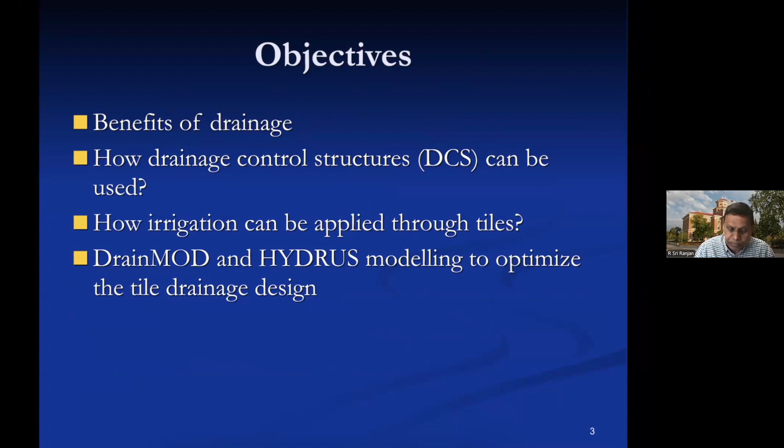Some of the benefits of drainage: water needs 5 times more heat to warm up compared to dry soil, and the only source of energy to warm up the soil is the sun's energy. Therefore, a drained field will warm up much faster, allowing cultivation and operation much earlier. Even if planted, soil will be ready for germination much earlier in drained soil than in undrained fields. In addition, wet soils have a high risk of soil compaction. You want the soil to be lower than the lower plastic limit, at least in the top 2 feet, so you can get on the field without damaging the soil. Drainage certainly improves the number of trafficable days, extending the time available for using your machinery. So basically, it's a win-win.

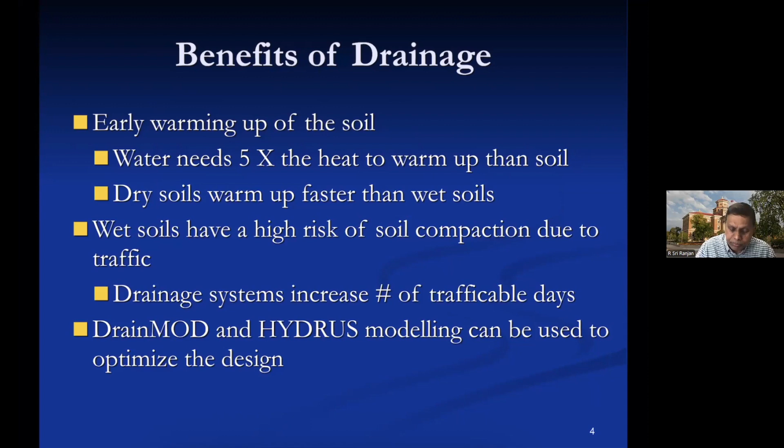We use, as I said earlier, DRAINMOD and HYDRUS for modeling, so we can optimize the design, and I will show you examples of that as we go along. Here is a complex graph showing the water table depth from the ground surface. In this case, this is the soil surface, and the tile drain is installed at 0.9 meters below.

And we have in the middle of the field a water level sensor in a piezometer that monitors every 3 hours what the water level is.

So if you look at this carefully, the blue line represents the drained field, and the red line represents the undrained field. You can see within 3 days of the rainfall, the water table went up near the surface and then dropped. The drop in the no-drain field was only 0.44 meters in 3 days, whereas in the drained field it was 0.7 meters in 3 days.

So the faster you can bring the water table down, the better it is for the crop. Obviously, the drain spacing will affect that. The closer the drain spacing, the faster the drop. But the closer the drain spacing, the more it costs to install.

We will actually talk about the spacing of the tile later on as I proceed in the next few slides. So this is actually a study done at Hespler Farms.

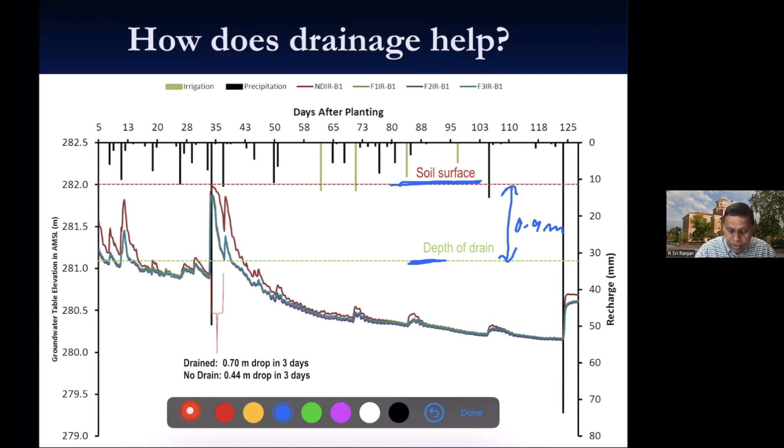In this case, you can see we modeled a particular field, for 2019, 2020, at the Pese site. You can see the dotted lines are the simulated water table depth, and the dashed lines in the bottom graph, and then the solid lines are the actual measured water table depth. You can see it pretty much matches what is being observed.

So once we model the field and calibrate and validate the model, then we can run simulations using rainfall patterns from different years.

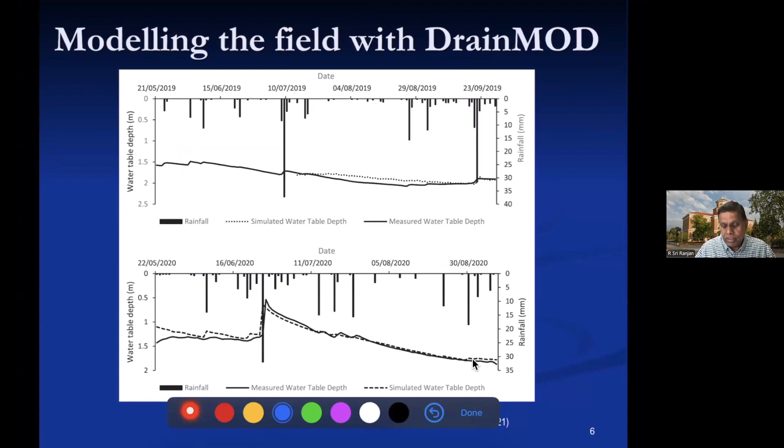So if I go to a different year, now this is again a complex graph showing at different years the impact of using different drain spacing. So we tested 8 meters, 15 meters, 30, 50, 70 and 90 meters, and we looked at the relative yield.

And for different years, you can see as you increase the drain spacing, the relative yield goes down. Some years it's worse, some years it's not that bad. It all depends on the rainfall for that particular year. If it's a dry year, drain spacing is not going to have much of an effect. But if it's a wet year, you're going to have an effect, and the drain spacing will matter.

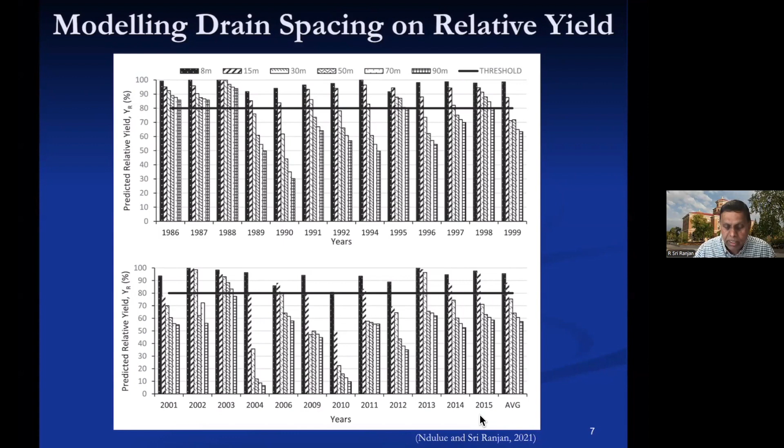So you can actually model this for every field and then determine what would be the optimum drain spacing. So this is one area where we try to optimize the design.

Here's another study where we actually use this data to predict the cost implications. Obviously, when you bring the spacing closer together, it costs more money. So we looked at the yield impact of increasing the spacing, and then also looked at the profit related to closer spaced drains.

And then we kind of optimized the design to about 10 meters in this case. So this kind of study will tell you, using long-term data, what would be the profitability of putting in a drainage system and what spacing we need to use for a particular field.

So this is actually based on field data, then trying to develop a model and using the model to predict what might happen under different rainfall patterns in different years.

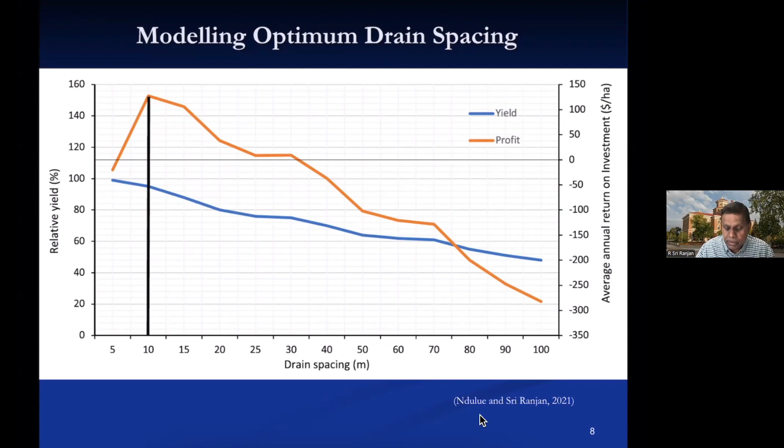Now in another study, we also looked at the workable days. In this case, we were looking at the soil moisture status in the top 2 feet of the soil. So as long as the water content in the top 2 feet of soil is below the lower plastic limit for that particular soil, we can get on the field without causing compaction.

So then we do a count of how many days we can get on the field. We also looked at the non-workable days and the total number of non-workable days. Based on this study, we found that around 12 meters is the spacing for this particular soil. So this kind of analysis helps us determine or at least optimize the drainage spacing.

So based on all of these studies, what we found out was we still have to get the drain spacing closer than what we are normally doing here. So I would say around 8 to 10 meters is probably the best way to go. And if you're going to put them so close, then there are other benefits as well, which I'm going to talk about in the next few slides.

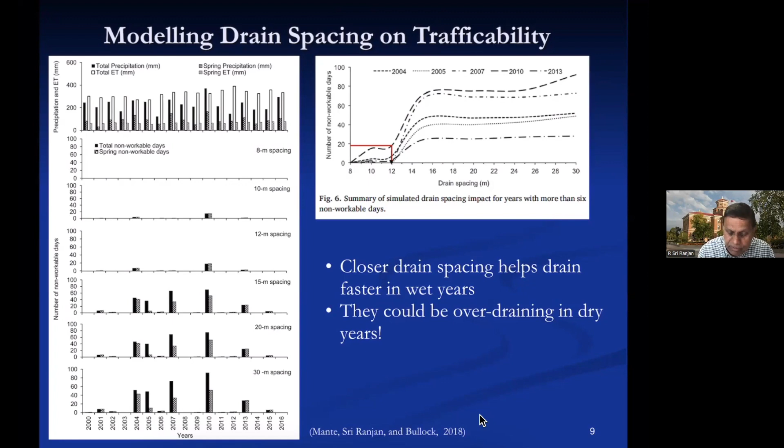So when you have the tile drain spacing less than 12 meters, we can also use it for sub-irrigation. And I will talk about that later on when I explain what sub-irrigation is all about.

Now, in addition to all of these, we also need to know what depth we need to install the drain, because the deeper you install, the wider you can go. But it affects the sub-irrigation potential. Since we are installing closer together, we can install them shallower, which is much better for sub-irrigation. So there's a trade-off there, and we need to look at that as well.

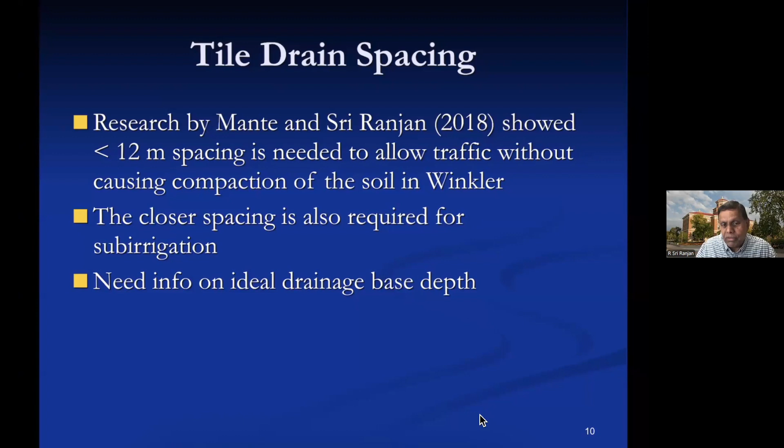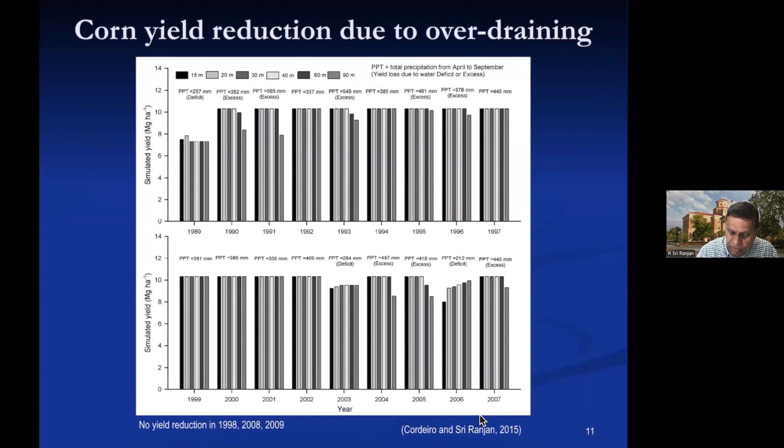Now here's another study that was done at Hespeler farms. You can see some years there's a yield reduction. If it's a deficit year, like 1989, the yield would have been very low. Whereas if you look at the year 2006, you can see that as you increase the drain spacing, the yield goes up, mainly because this was a dry year and narrow spacing was actually draining the water.

This is actually modeled after free drainage, meaning we are not controlling the amount of water outflow. In years like 1992, the rainfall pattern was adequate, so the spacing didn't matter much. In 1991 there was a slight excess, but up to a certain level there wasn't much effect. But if it's a wet year, the spacing matters. If it's a dry year, the spacing will affect it the opposite way.

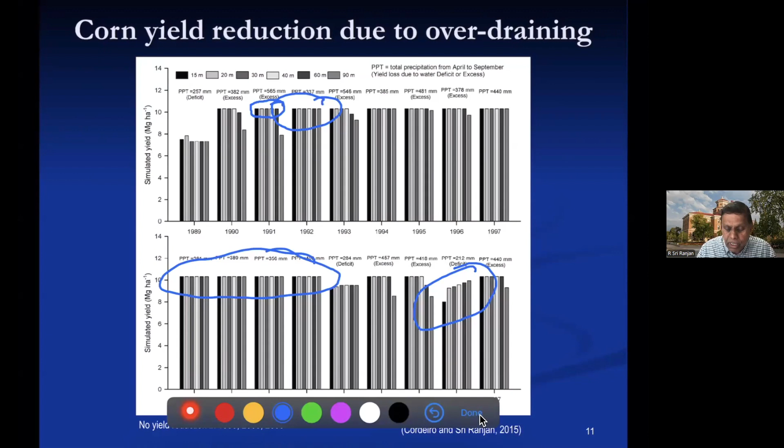So the main idea here is to not overdrain the field. If you're not going to overdrain the field, there's a practice called control drainage, where you're trying to limit the outflow from the free drainage. There are techniques available to limit the outflow, and this is where control drainage comes into play.

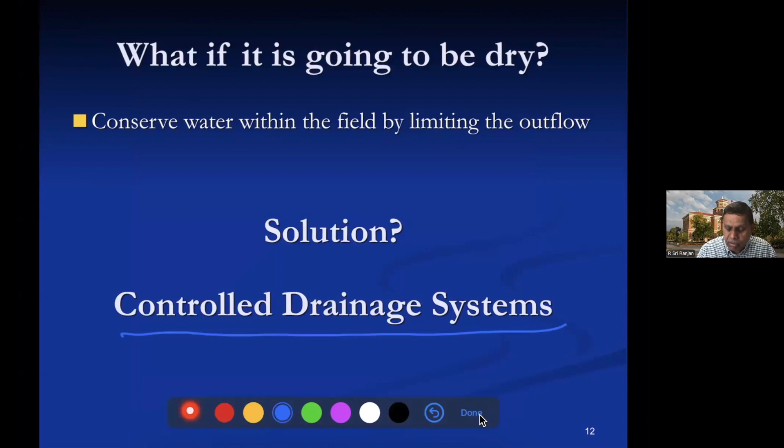With control drainage, what we do is have a gate at the end of the tile at the outlet, like shown here. We can raise and lower this gate to control the level of the water inside the field. But if the field is sloping, you might cause an uneven depth of water within the entire field, and you might defeat the purpose of having a control structure.

So in this case, you may want to have an inline control structure along the length, so that the water surface will be dropping at foot intervals as you go down slope.

Before control drainage came into play, most field drains were installed downslope, because for transmitting the water, the faster the water flow, the narrower or smaller the drain you can use. So you can move the water faster if the field drains are downslope. That was generally the practice for decades.

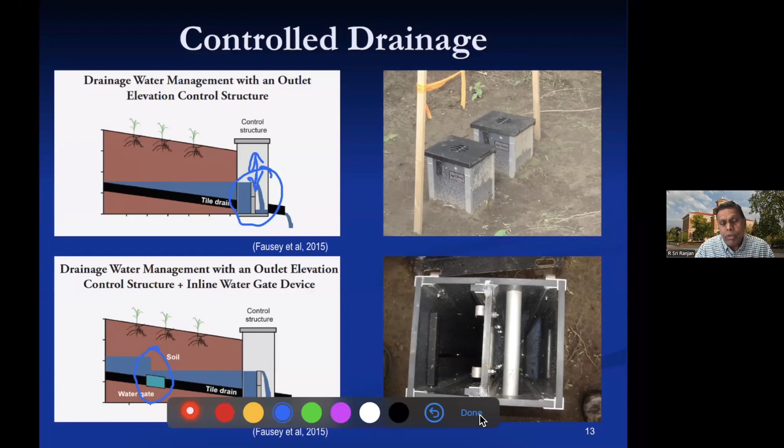But with control drainage, that design is not conducive, because in control drainage you want the field drains to be on the contour so there'll be even spreading of the water, and the downslope will be the collector drain or the submain.

So let me show you how that works. Here you have the field drains going parallel to the field, almost on the contours, with the submain going downslope with control structures called water gates installed, so they step the water at one foot intervals. By blocking the water at the outlet right here, water will back up and go one step up, back up again, one step up, and so on. This way the entire field's water level can be controlled with one outlet point.

But this requires careful design. This is the part I wanted to convey as the main component of this study, or at least this presentation: the orientation of the tiles that are installed is very critical to make this work properly and to gain the benefits.

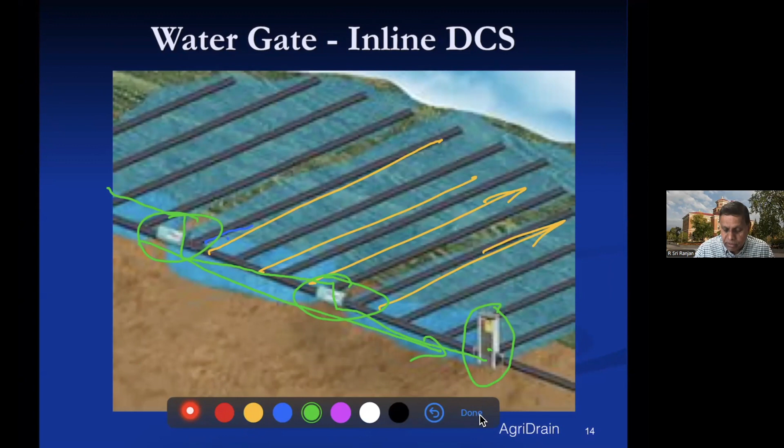This is a particular study that was done, reported by Fausey, I believe from North Carolina State University. This is another study that was recently reported, I'd say about 10 years ago.

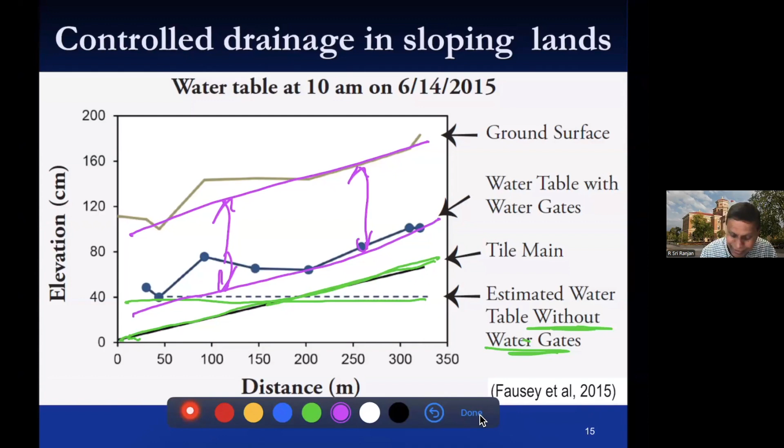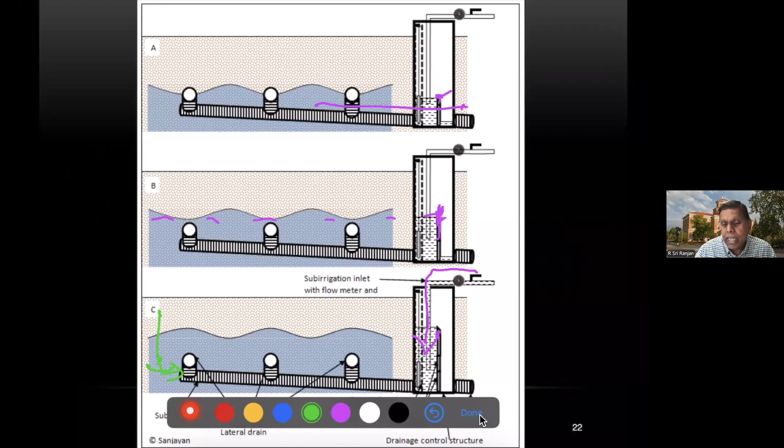So these are the three different modes in which the control structures can be operated: one is the free drainage mode in the springtime, another is the control drainage mode when you anticipate there won't be any rainfall and you don't need to drain the field completely, and if you want to sub-irrigate, you can apply water back through the tile.

Now, what are the problems? The upward flux of water to meet plant water uptake works against gravity, and it's also affected by soil water content. If the soil is dry, the upward flux is going to be limited; the wetter the soil, the greater the upward flux. So the soil moisture in the upper layers, at least in the root zone, will control the upward flux.

The layered soil will also affect the upward flux. If you have any kind of sand lens, the upward flux will be limited. So this is something that should be kept in mind before we design the system.

Soil sampling in the field to determine the horizon and the variation in soil texture needs to be considered. Some of the things we can do is input this information into a computer model and run simulations with 30-year weather data to predict what might happen. So before investing a lot of money into this system, it's better to do a little study and evaluate the field for appropriateness, or at least for the situation at hand.

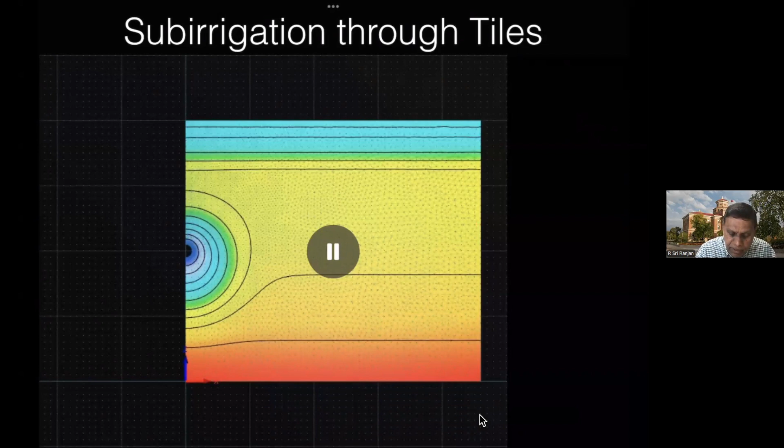The redder the surface color, the drier it is; the more blue, the wetter it is. So we're applying water through the tile, and it's spreading slowly, going below as well as above. But if I increase it, you begin to see some wetting on the surface - that's because it rained in that particular field, adding moisture on the surface, and over time...

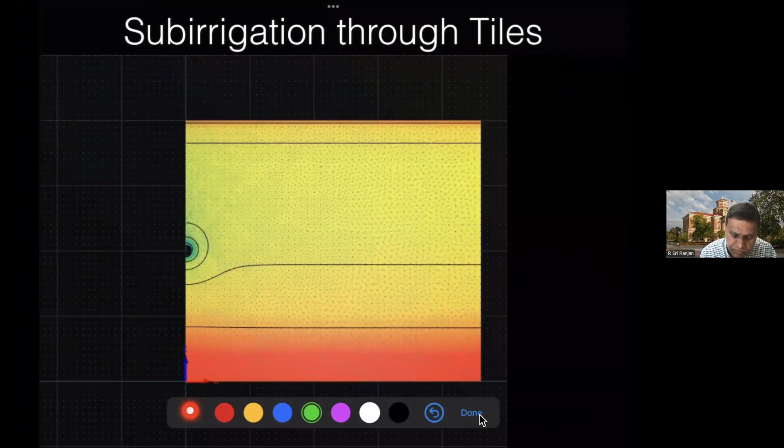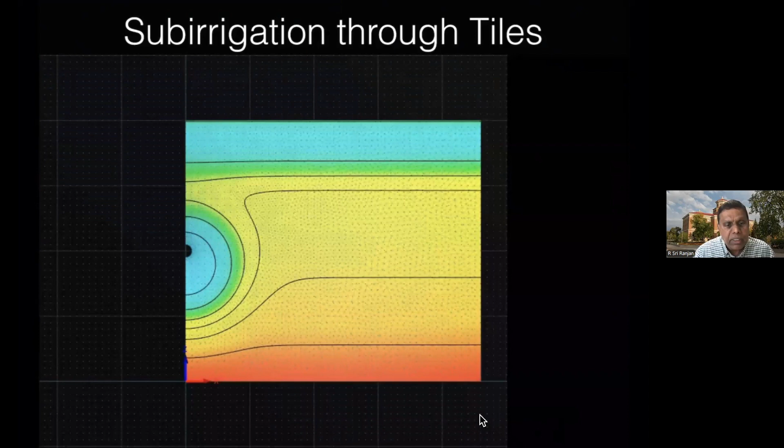Let me run the simulation to show you what's happening. Over time, the simulation was done over 30 days, and you can see it is making a connection. Once the rainfall occurred, they stopped the flow, then applied water again, and you can see it's continuously spreading all the way up.

As long as the soil remains wet, you can actually supply water from the tile all the way to the middle space between drain tiles. So it is effectively irrigation using the tile. But if the rain didn't happen, there will be a hydraulic connection problem, and in that case you may have to use pulse application. That's what we are trying to optimize now - how to operate sub-irrigation if there's no rainfall at all. That'll be a tricky situation.

This is a model of the field at the Pesay site, which is completely clay. In fact, it works better on clay soils than in sandy loam soils.

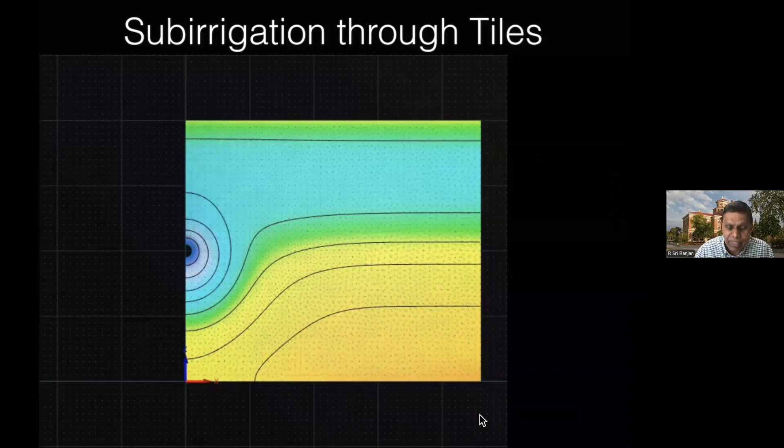Some advantages of sub-irrigation through tiles: you don't have additional irrigation equipment, no labor, and water is directly applied to the roots so it can be automated. Also the leaf canopy is not wetted, which prevents fungal disease. So there's savings there, and also a higher application efficiency.

If you continuously apply water, it will actually go down below the tile due to gravity. So that's something you need to control in how you're applying it - there's a protocol to follow.

For all of this to work, the installation depth is very important, because if the drainage installation is too deep, it may not work as effectively as when it's shallower. So let's look at the impact of the depth of installation.

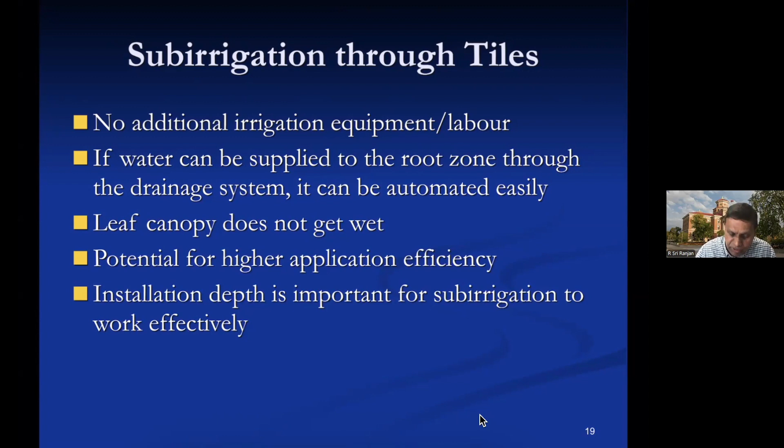Here's another simulation done at the Hespeler farms. We looked at the water table depth kept at 1.3, 1.1, 1, and 0.9 meters below the ground surface. I'm going to show a series of simulations from 55 to 104 days after planting, in a potato field. This is another study we did long ago - the data was collected a long time ago, but the simulation was done a couple of years ago. Let me show you what happens.

We start with the deeper depth. When the drain is located at 4.3 feet, rainfall causes the water to infiltrate down. We'll wait for the simulation to continue. As it's coming down, you can see it's going down, also below the 1.3 level. There's very little water being pulled up the other way - the arrow is pointing down. So this is for 1.3 meter depth.

Now if you go to the next depth, 1.1 meters, the rainfall is going down, and as it gets wet, it keeps going down, and the plants are evapotranspiring, but there's no chance of it being pulled up the other way. It's pulled up - on the surface water is being taken up, but very little is beginning to move up at 1.1 meters.

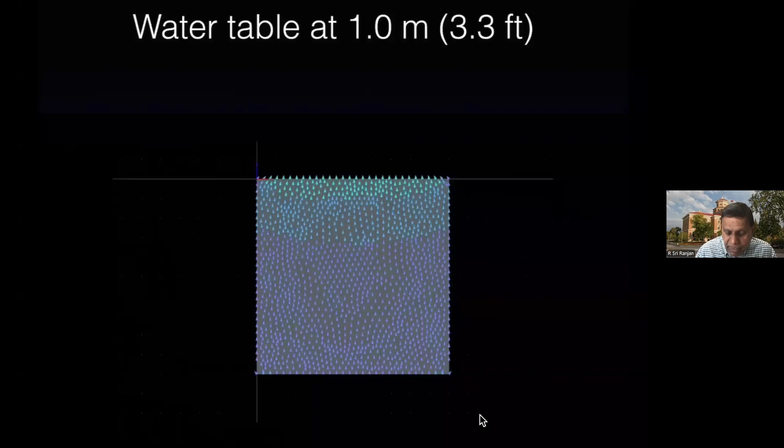When you go to 0.9 meters, about 3 feet, you can see it going down. Then when there's no rainfall and evapotranspiration takes place, it's beginning to connect easily and pull the water up very effectively - you can see it's supplying much better.

So in Manitoba, we usually install the tiles around 0.9 to 1.1 meters - that's what we've done in our fields. It looks very critical, the depth of installation, if you're going to use it for sub-irrigation, also for controlled drainage too. The closer it is to the surface, the better, but that means we also had to use closely spaced drains. That's the important takeaway from this particular simulation.

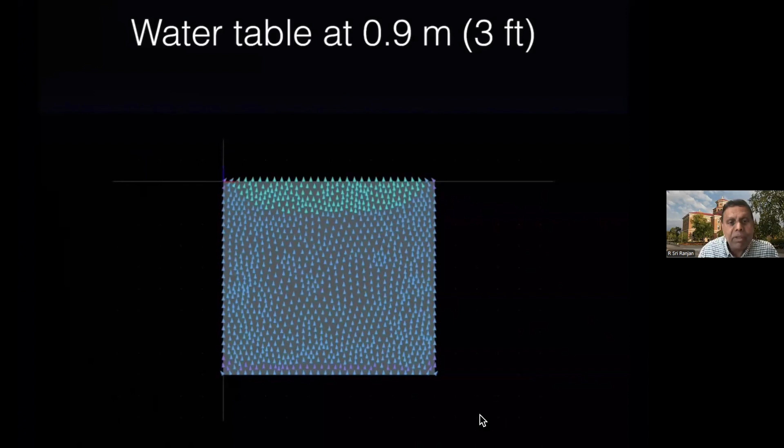So in summary, the soil profile information is very critical. If you have any kind of sand lenses or different texture soil in the horizon, it's going to affect how the controlled drainage or sub-irrigation is going to function. So that is important, because when you're planning for the system, it might be better to take soil samples in the profile and model this, seeing how well it works using multi-year rainfall data, and making sure you optimize the design.

Also maintaining the hydraulic connection is important. What it means is you shouldn't allow the soil to dry too much, because the drier the soil, the lower the upward flux. The hydraulic conductivity, or the ability of the soil to transmit water, will be affected by the soil moisture content. So you don't wait till the soil dries out before you start to irrigate. You start to irrigate closer to when you're beginning to lose moisture, and if you forecast a dry spell coming up, you start to sub-irrigate early on.

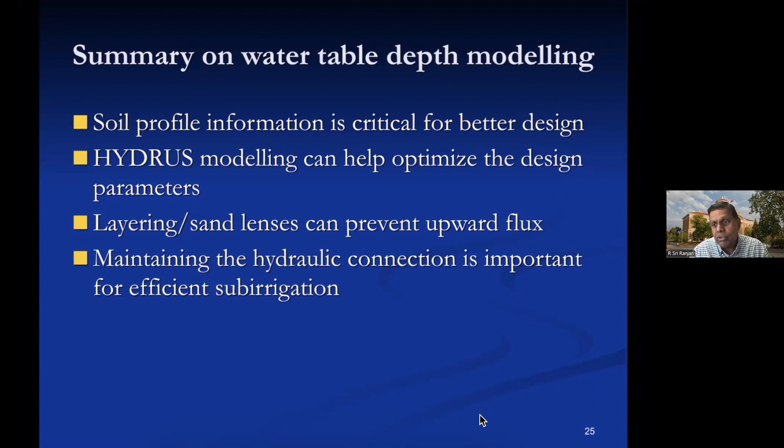Now, we also did a previous study in Hespeler farms looking at nitrate export. FDIR stands for free drainage with overhead irrigation. CDSI stands for controlled drainage with sub-irrigation. This study was done back in 2010, 2011.

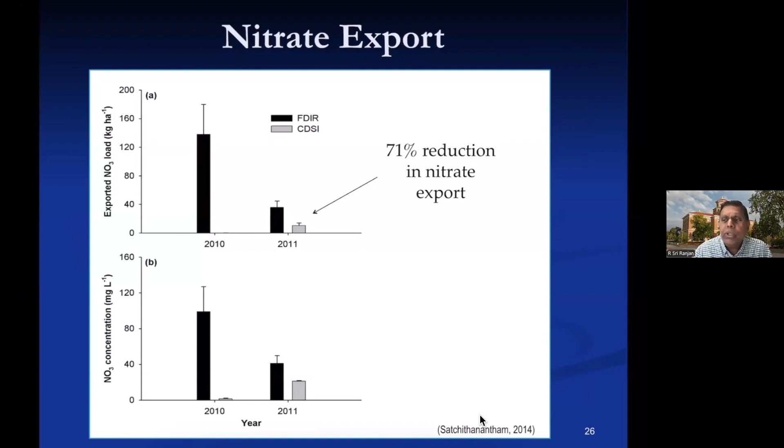You can see that the free drainage actually exported a lot of nitrates, but most of this happened during the springtime. Similarly, we looked at phosphorus export, which also happened in the springtime. The control drainage or control structures actually limited the outflow of water, thereby limiting the amount of phosphorus export.

So what it means is, in the springtime, if you're going to drain the water, it'll have lots of nutrients. If there's a way to hold the water back in some on-farm storage, it'll be ideal to do that, so you can also use it back to irrigate later in the season. So that is something to consider.

I think other jurisdictions like North Dakota and other places are considering holding the water back in on-farm reservoirs. At least at Hespeler farms, they're not doing it from the farm, but they are holding the spring snowmelt. There's a way you could pump the water back into the same reservoir, but they have not done that yet. It is possible to do that. It does help to hold the water back in springtime, because most of the nutrient export happened during springtime from the tile drainage.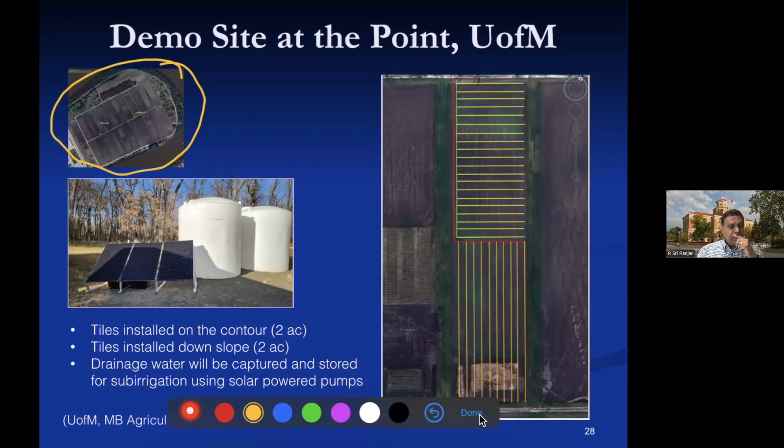Now, based on all of this research, we wanted to develop a demonstration facility on campus here. What you see on the top left is the point at the University of Manitoba campus. Through the ESCAP funds, we were able to install tile drains the conventional way, downslope here, with the cross slope on the contours. These are 2-acre plots, and the collector drains are going into a sump pit individually. We are using a solar panel operated pump to pump the water coming out of these 2-acre plots into storage tanks.

We are going to use this water. This is the first season we're trying to collect it, since it was installed last fall, around August, September. We installed this, and we are going to collect the water and pump it back through the tile to irrigate. This will serve as a demonstration plot for anybody to come and see how this works. We haven't planted yet; coming season is the first time we're going to plant.

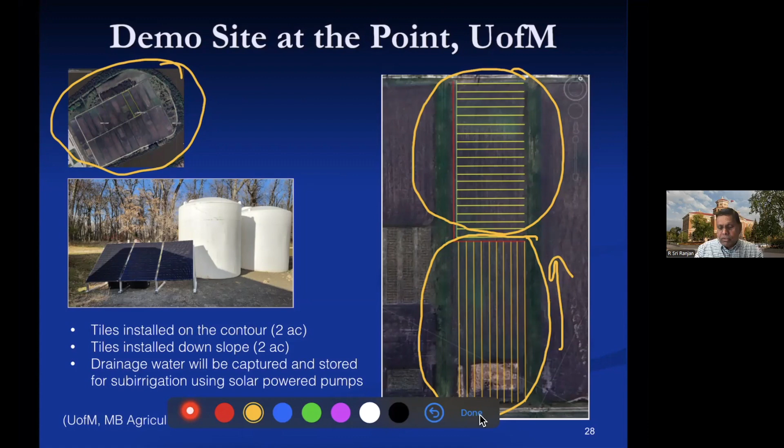The idea will be to compare the differences in yield coming from different locations, depending on how you operate the control structure. Because the land is sloping this way, the cross slope is minimal along east-west, whereas there's more slope going north-south. We'll see the impact of this in the coming seasons, and there will be a lot more studies done at this particular site. Anytime anybody wants to come take a look, you're welcome to connect with us and come see the place. We might have some open houses towards the end of next season.

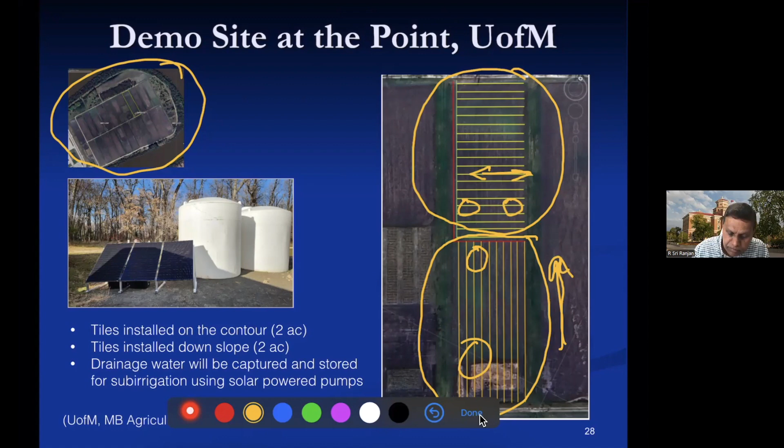So in summary, I just wanted to say controlled drainage management can conserve water and nutrients within the field, and it is possible to sub-irrigate through the tiles very efficiently.

So that way you can also reduce the water usage. If you want to consider using control drainage and sub-irrigation, it is very important to put the tile drains on the contour, almost on the contour, with the sub-mains running downslope. That is the most important takeaway from this discussion we are having today.

And you can use inline control structures that are installed on the sub-main. This way you reduce the cost. You don't want to put inline control structures on the field drains because there will be too many. So this is the best design to go with the inline control structures on the sub-mains, and ideally you want to evaluate the field before you embark on a drainage installation.

And then, of course, if you're going to sub-irrigate, it's going to be done through the high end of the sub-main, because if you have inline control structures, you wouldn't be able to push the water through the other way. You can only push the water one way from the far end of the field. So those are some important considerations to keep in mind when you are planning the system. So that's all I have, and I will be more than happy to answer questions.

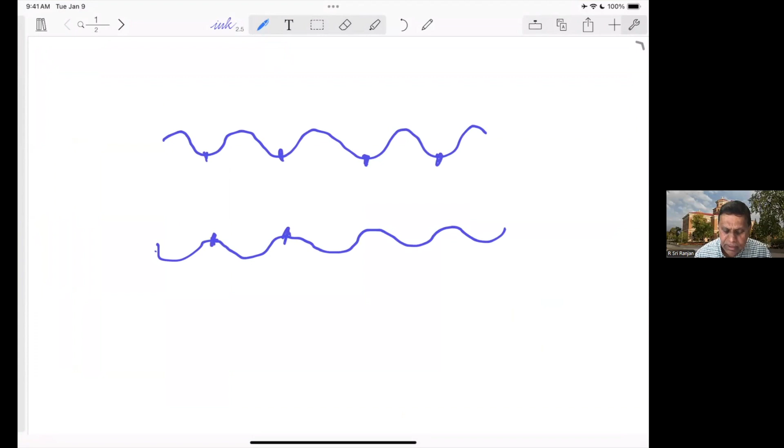The corrugated tiles are like this, and the slot openings are cut like this at the inner end of the tile. Having a sock around the tile like this keeps the soil away from this area. So the water will enter here and is free to move around the annular space, which reduces the resistance for water to enter the tile. So having the sock not only functions to keep the soil particles from entering the tile, but also reduces the resistance for water to enter the tile. So it is very important that you always get the tile with a sock.

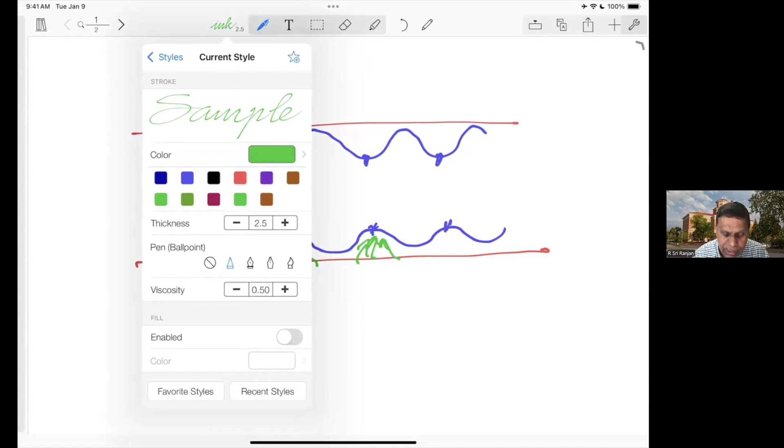Okay, and I think that is how they are sold anyway. If you don't have the sock, soil particles will collapse into the gaps here, and the resistance to flow through the holes will be much more, so it wouldn't drain as well as if you had the socks. So socks not only keep the soil particles out, they actually reduce the entry losses, the hydraulic losses that happen at the tile itself.

So is there a specific one, or would generally any sock or cover work? Yeah, it's like a woven plastic material that is stitched onto the surface of the tile. That's how it is supplied. All tiles are supplied with the sock, and the main purpose of the sock is not only to prevent soil particles from entering the drain, but more than that, reducing the entry losses.

So, can you comment on drip irrigation, what equipment it needs, and how much water it can save? Drip irrigation is on the surface, and I would say at 10 cents a foot, it'll cost $250,000 to install drip irrigation for a quarter section. From a cost point of view, it's way more costly to install drip irrigation on a farm field compared to a center pivot system or any other system.

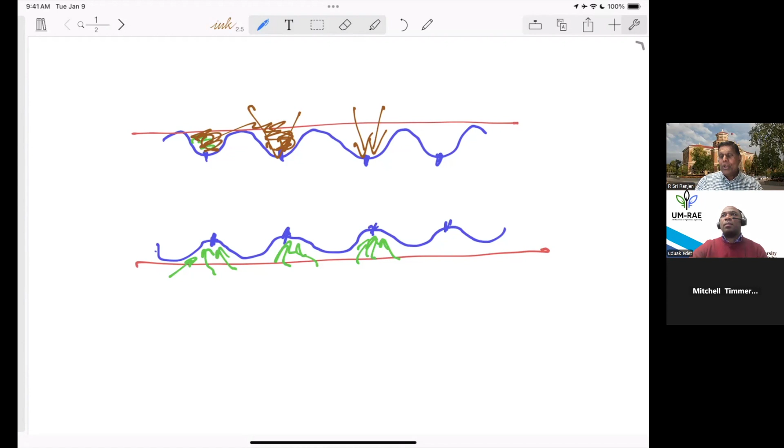Sub-irrigation in coarse textured soils is going to be tricky because it wouldn't spread as well as in a fine textured soil. And generally, coarse textured soils will be well drained anyway, so you may not have that much benefit by putting in tile drainage. You're going to put tile drainage in fine textured soils anyway, right? So unless you have very high water tables and you're trying to control that, it'll be less effective in coarse textured soils.

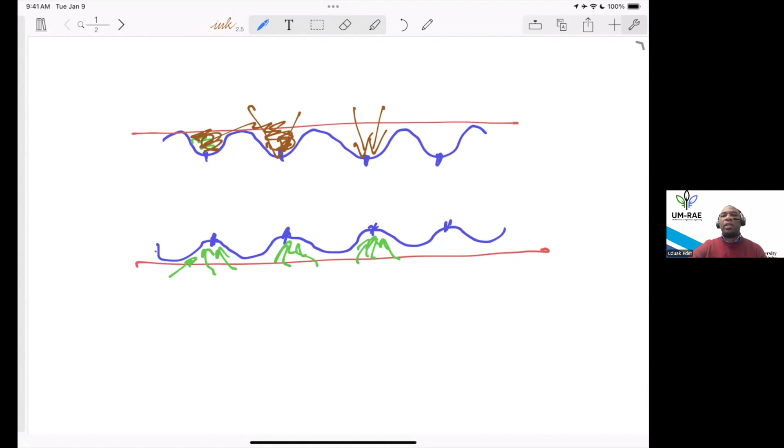Another question: in heavy clay, how much infiltration efficiency could a farmer expect when reusing captured tile rainwater? What is the question? In heavy clays, how much infiltration efficiency could the farmer expect when using captured tile rainwater?

I would say, if you apply the water at the right time, capillary movement itself will be able to supply the water, as I showed in the simulation. But you shouldn't wait until the soil dries out too much, because the wetter the soil, the easier it is for the water to move from one location to another through the soil. So it's important when you apply the water, you don't want to wait till the soil dries out, because then it becomes impossible to apply the water. That's why I think it's important to have soil moisture sensors installed, to manage the water properly. I think that's a given, but most people don't do that. Knowing what's happening beneath the ground surface is very important to manage the water properly, right?

Please comment on the merits of active sub-irrigation versus passive holding back drainage water system in terms of features, design, and cost.